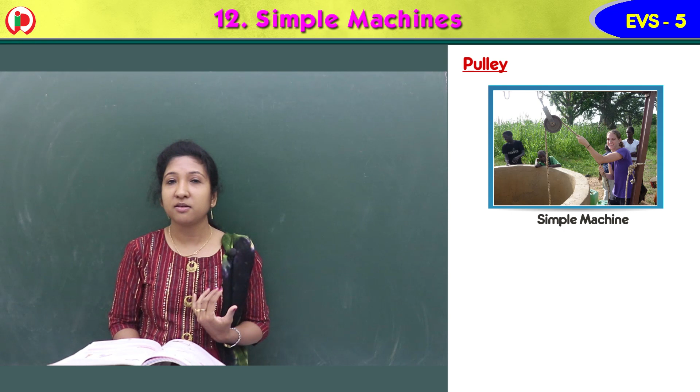Next simple machine we are going to learn about is pulley. Have you seen water drawing from a well? When drawing water from a well, we are using pulley to draw water easily. Without a rope and wheel, if you wanted to take water from a tank or well, you'd have to apply much force. It's not that easy, but when we use this pulley and rope, easily we can take the bucket of water from the well. A pulley is a simple machine made up of a wheel and a rope.

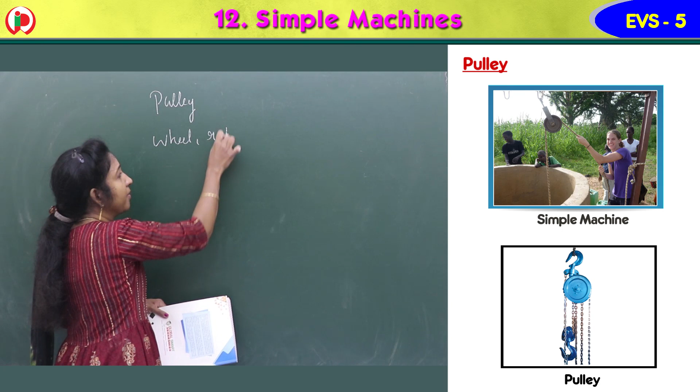Pulley is a simple machine made up of a wheel and a rope. A wheel is there and inside, a rope is there. When we apply force on this side, the wheel will rotate and take the bucket of water, that load, up. The rope fits into the wheel and one end of the rope is attached to the load, while the other end is fixed into the wheel.

Example: drawing water from a well. You can see the wheel is there, and the rope is also there, fixed inside the wheel. One end of the rope has the bucket, the load. When you pull on one side of the pulley, the wheel turns and the load moves. Pulley helps to move load up, then down, and sideways.

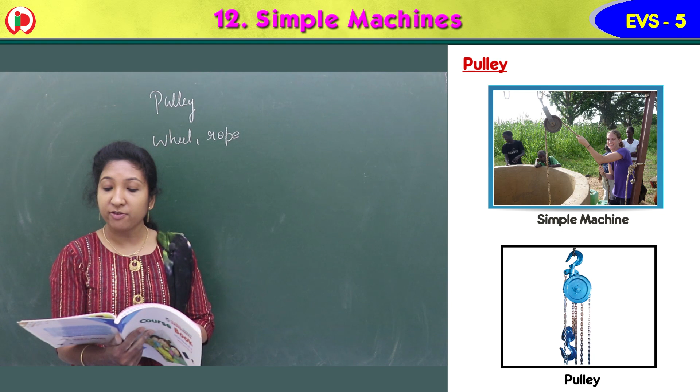It makes the load work easy. In a pulley, an effort can be applied in one direction and a load can be moved in another direction. Pulley can do twice as much work with the same effort. That is an example of drawing water from a well. We can use this pulley to take the load up, take the load down, or move it sideways. That is the main benefit or advantage of using pulleys.

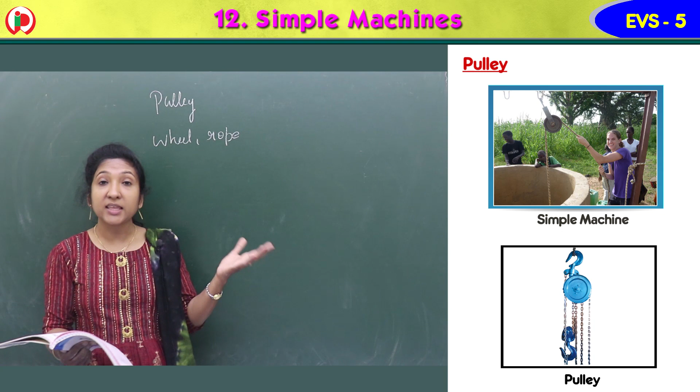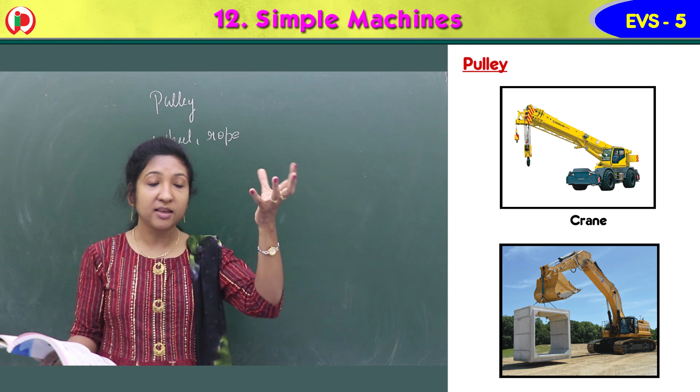You can see the pulley image there, and you know the crane. We use crane to lift heavy objects, to dump objects, and to move objects sidewise also. Have you seen a crane taking objects, moving them here and there, and dumping everything? Yes.

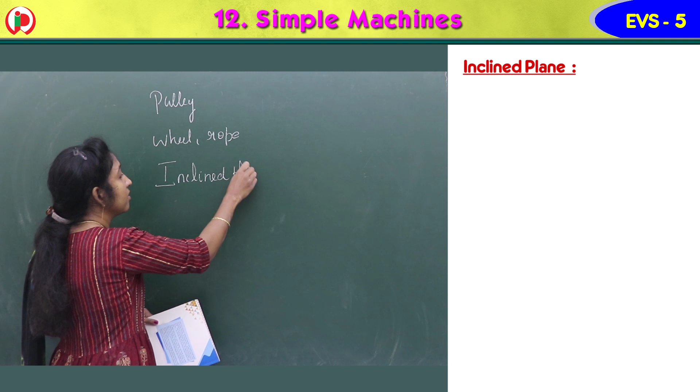Next simple machine we are going to learn about is inclined plane. Inclined, we also say slope. Using an inclined plane, we move objects to a higher place. Using a slope, we move it and take it to a higher place. Ramp and slide are other examples of this inclined plane.

You have gone to a park and enjoyed riding a seesaw, a slide, and even a ladder. A ladder you climb, then you move from that slope, from up to down. The slide and ladder are inclined planes, we say - the slope. Easily you can come down, isn't it? That is an example for inclined plane.

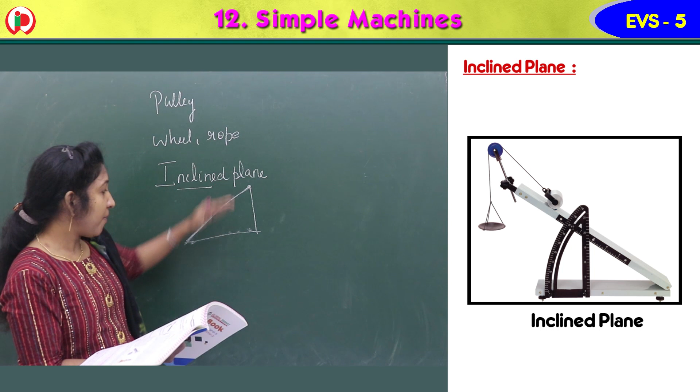An inclined plane is simply a ramp or flat sloping surface. Actually it is a flat surface with one end higher than the other. This is called a slope, or inclined plane. One end is higher than the opposite side, and this allows things to go from a lower place to a higher place.

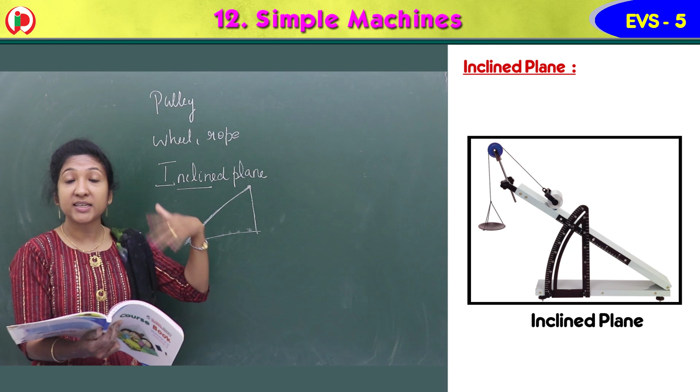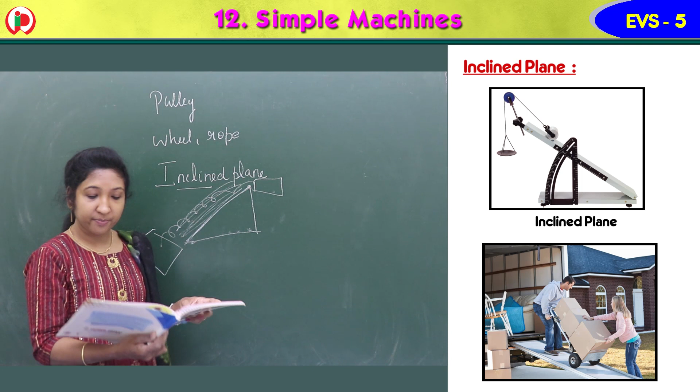It is used to move heavy loads to a certain height. Suppose you want to load a heavy box into a truck - what people do is put a sloping surface like this at the back of the van, roll the heavy box up it, and load it into the van. So loading heavy drums or boxes into the truck.

Less effort is needed to move the object with an inclined plane compared to a steep slope. So very little force is needed to move the object from a lower to a higher surface - we can move it easily. If it's a very heavy object, you can roll it through this sloping surface and take it to the higher surface. This is the main principle behind the inclined plane.

To load heavy objects from a lower surface to a higher surface, we use an inclined plane. You can see people on wheelchairs - on steps it is not possible for them to move, so a ramp is there for them. Easily they can go through that ramp. People going through a ramp - ramp is an example of an inclined plane.

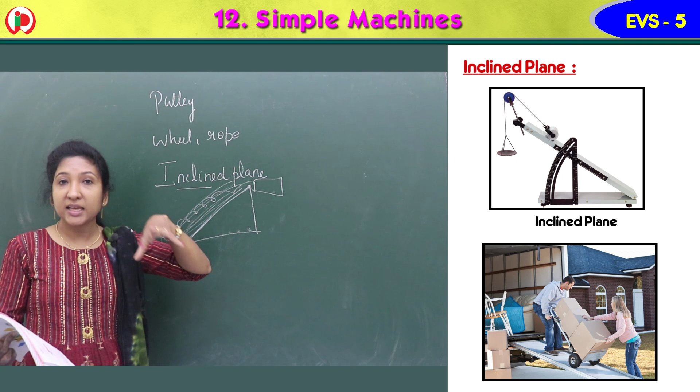Some hospitals, instead of steps, have provided ramps, isn't it? Even we can walk through it easily, and for people who are on wheelchairs also, easily they can go up and come down instead of climbing steps. Yes, that is inclined plane.

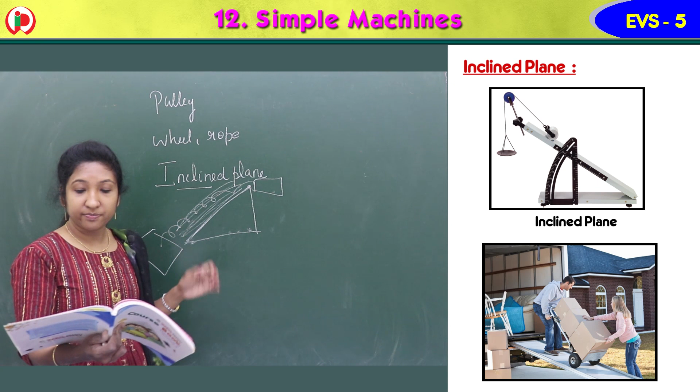Next is screw. We use screw for many things, to screw many items, isn't it? Example, table. Table has 4 legs, 1, 2, 3, 4. How those legs are held there is because of that screw. Using screw, we are fitting the legs of the table there. The other tables, not iron tables, we use screw to attach it, isn't it? Door knobs and all, doors attached, windows attached to the wall. We have some screws there to attach these windows and doors to the wall. We use screw there, isn't it?

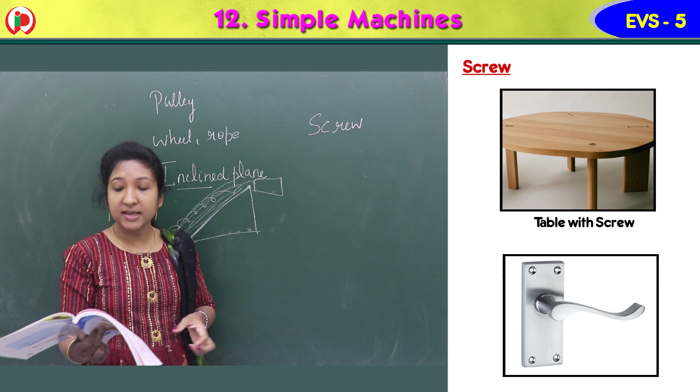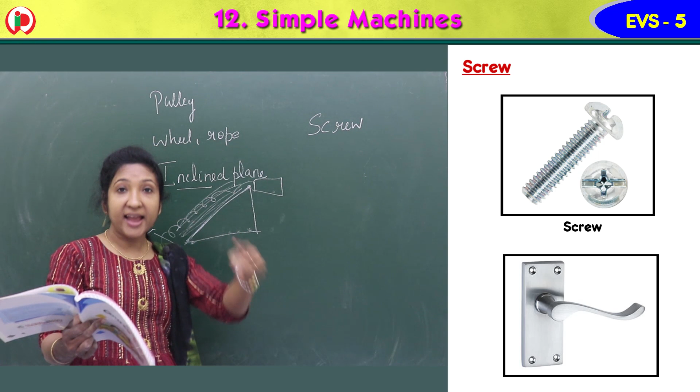Yes. A screw is a simple machine made up of another simple machine. It is an inclined plane wrapped around a cylinder. You can see the image of a screw there. Something is wrapped around like this. It is an inclined plane, we say. Then it has ridges or threads, something that is wrapped around as threads.

Then that changes the direction of force applied. The circular motion helps to move things upward and downwards. A screw holds things together over a longer distance with a stronger grip. We can use screw to hold some things. To drill a hole, we need screw. To hold something, we can use the screw. Then we attach doors and windows of our rooms to walls with screws. A screw is used to lower and raise things, to hold objects together.

Have you seen in workshops, mechanics, how they attach the tire, or if the tire gets punctured, what they will do? For the vehicle, car tire and all, using a screw jack, they make that vehicle go up. Then the vehicle will be a little bit up, so they can do the work easily. They use the screw system there to raise the tire of the vehicle, then easily remove the tire and do the work.

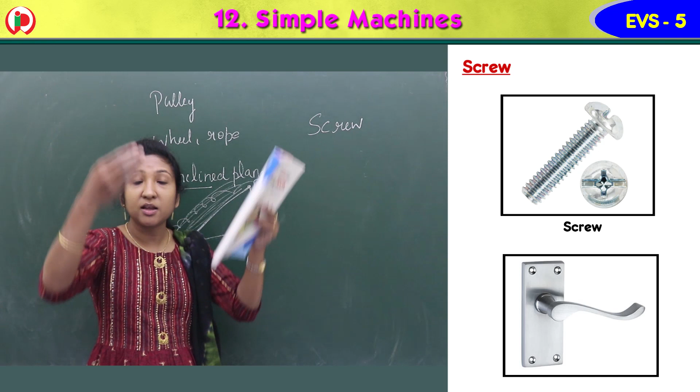So screw, we can use it to hold the objects. We can use it to raise the object. You can use it to drill holes in a wall to fit something. So for all these things, we use screw. Screw jack is also a simple machine which is used to lift up the side of a car or a bus while replacing its wheel or tire.

It is not possible for a human being to lift the bus or car by himself. So using the screw jack, we raise one side of the car up, isn't it? Then we can remove the tire and put the new tire. So that system using the screw, they use the screw jack there, isn't it? Yes, that is about screw.

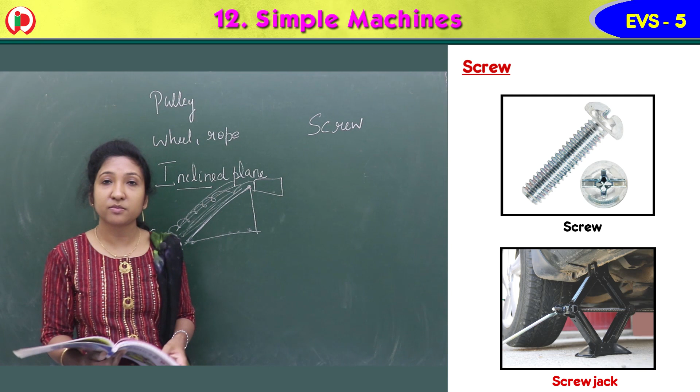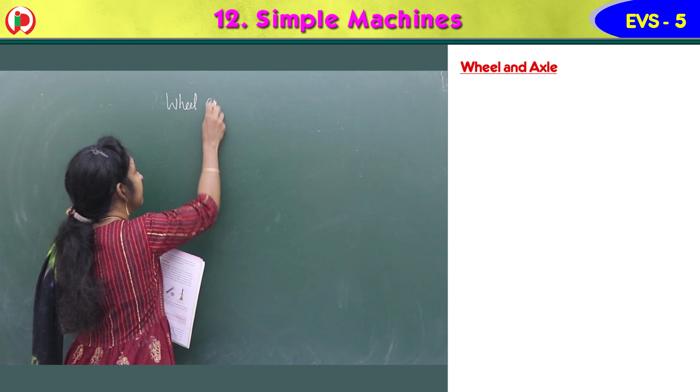So children, next is about another simple machine, wheel and axle. A wheel and axle has two parts. Which are the two parts? Wheel, then axle. These are the two parts of wheel and axle. The axle is a rod that goes through the wheel.

We can tell the example of steering of a car, a wheel of a bicycle. These are all examples of wheel and axle. In the steering of a car, there are axles, isn't it, which make the wheels rotate, same like the wheel of a bicycle.

This lets the wheel turn. A wheel and axle helps to move objects. The faster the axle is turned, the faster the wheel spins. The axle is turned. When we turn the axle faster, the wheel will rotate faster.

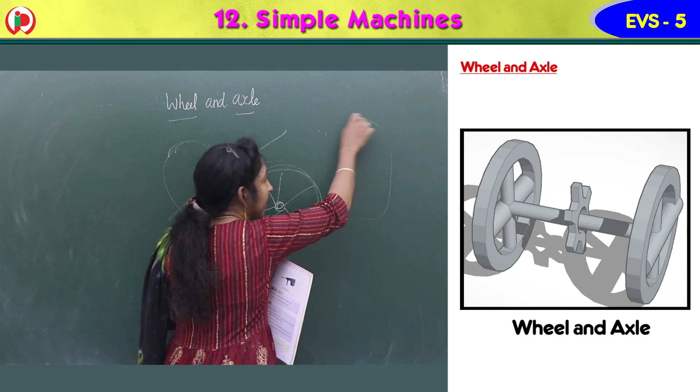The idea of wheel and axle was created when past societies like Egyptians used round rocks under heavy objects to move them. Long years back, Egyptians used round rocks under heavy objects to move them.

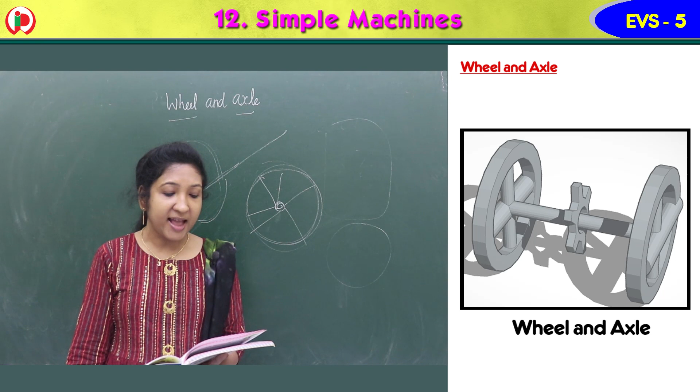The two examples of wheels and axles are roller blades and gears in clocks. Roller blades, like skaters use. Under the shoes we keep those wheels which makes people move faster.

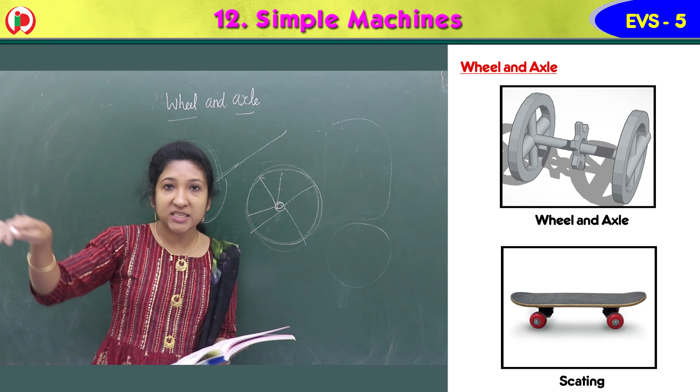Then gears in clocks. In a clock you can see the hour hand, minute hand, second hand. So this axle makes this wheel rotate, isn't it? So gears in clocks, in watches.

Then they are machines because they help people to move faster. The hands of a clock move because of gears. The hands of the clock are moving because of these gears.

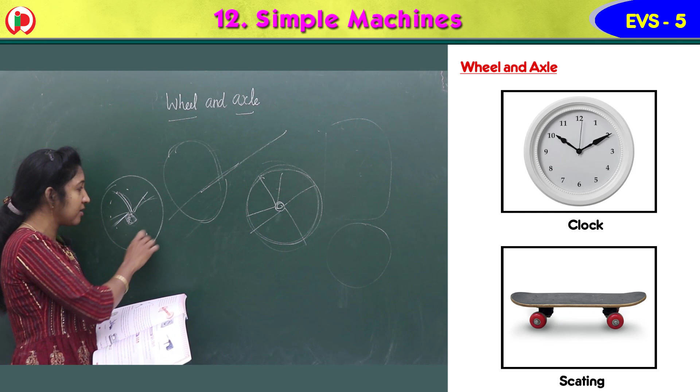The round circles with ridges turn, acting like a wheel. The hands of the clock are attached to axles. Because of that it is rotating, and we are seeing the time, isn't it?

So roller bladers or skaters, and gears in watches, these are all examples of wheel and axle. Wheel of a bicycle, steering of a car, these are all examples of wheel and axle. Wheel and axle has two parts: wheel and axle.

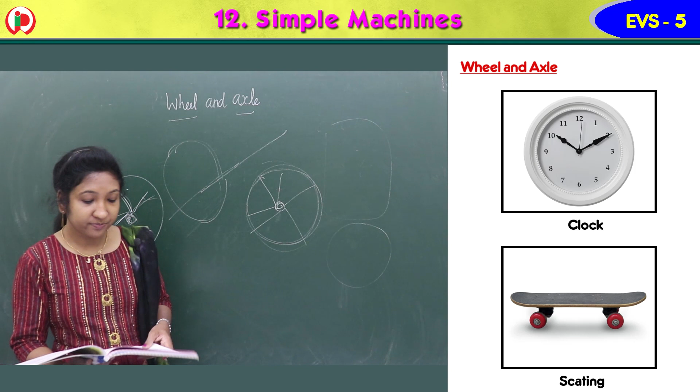Next is another simple machine: wedge. The main example of wedge is an axe, which we use to split wood into two parts to cut the wood. Axe is a simple machine, it is nothing but a wedge.

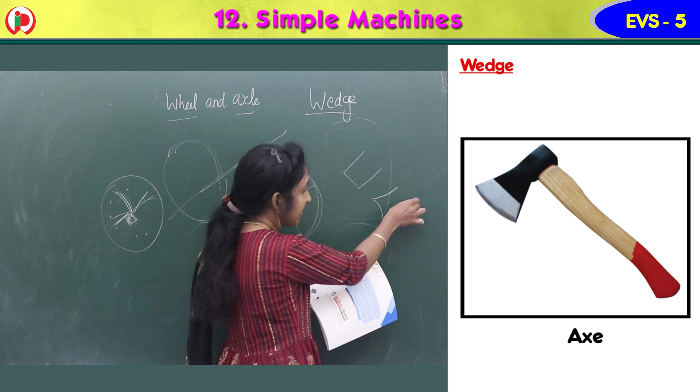Axe works on the principle of wedge. A wedge is a simple machine made up of two inclined planes put together. See the axe picture, we can see two inclined planes put together, one here and one here, forming the axe. So wedge is a simple machine made up of two inclined planes put together.

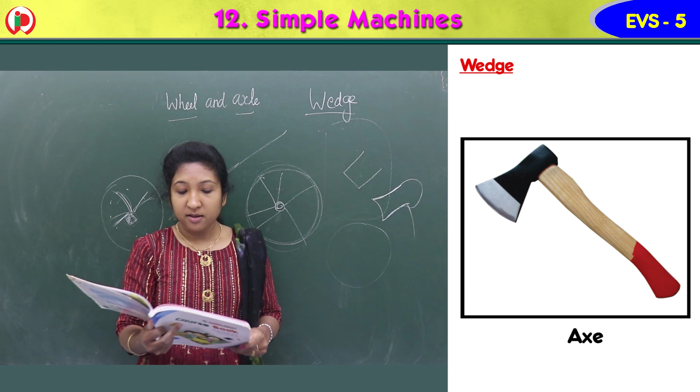These two planes meet and form an edge. Wedges are used to push two objects apart or cut objects into two pieces. If we apply an axe to a big piece of wood, it splits into two. We use wedge to cut objects into two parts.

A wedge gets in between objects and splits it apart, for example an object like wood can split apart with a wedge. You probably use a wedge every day.

A fork is considered a wedge. It is made up of 4 to 5 wedges put together, and it can be used to cut or split food apart. We can split food, cut food, and hold it, so there are many uses for a fork.

So wedge is a simple machine with two inclined planes put together, for example a fork or an axe. We use an axe to cut wood, splitting it into two parts. So for cutting or splitting objects into two parts, or holding objects, we use a wedge.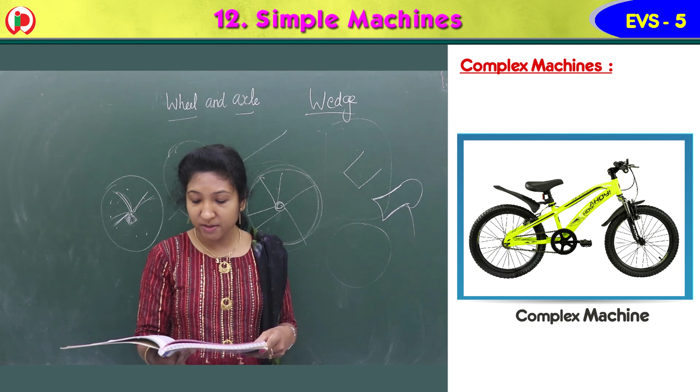Complex machines, I already told you, a bicycle is a complex machine because it is made up of many simple machines. Many parts of simple machines together form a bicycle. So a complex machine is a combination of two or more simple machines that work together, such as when a lever and wheel and axle combine to form a cart.

You have seen a cart pulling objects, isn't it? A cart actually uses a lever as well as a wheel and axle. It has wheel and axle, and a lever too, put together to make the cart. A bicycle is an example of a complex machine because it involves the use of two wheels and axles.

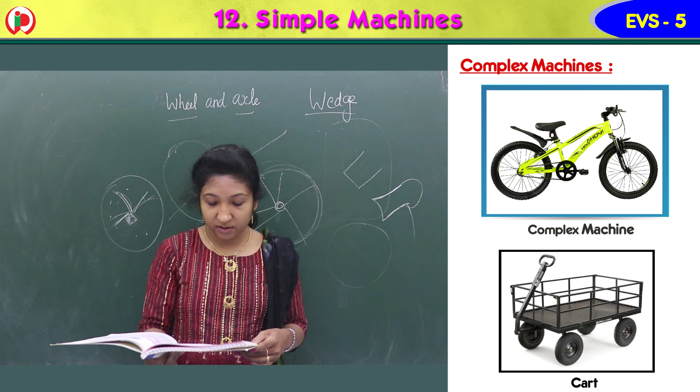Here are some other examples of complex machines. A clock is an example of a complex machine. Aircraft or aeroplane is an example of a complex machine. A sewing machine, used to stitch clothes, is an example of a complex machine. A washing machine is an example of a complex machine. A drill machine is also an example of a complex machine.

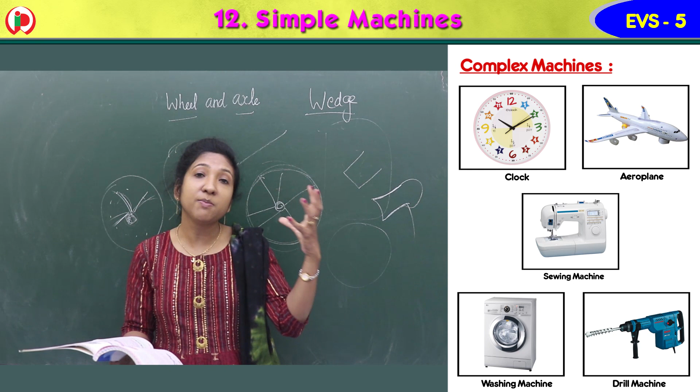A complex machine means it's a machine made up of two or more simple machines. Two or more simple machines together form a complex machine.

Words to remember. Ridge means a long, narrow hilltop or mountain range. Wedge is a piece of wood or metal having one thick end, called a wedge. Example is axe, we know, isn't it?

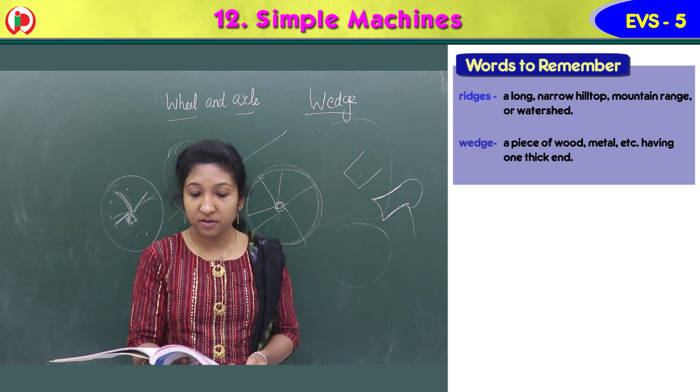We learned about types of simple machines. Machines make our work so easier. It helps us save our time, and it is very convenient for us to use machines. There are different types of tools or simple machines we use in our day-to-day life. Knife, axe, scissors, these are all simple machines, we say.

There are 6 types of simple machines. We learned about lever. Lever has 3 parts: rod, fulcrum and effort. Examples: seesaw, ice tongs, forceps, hammer. These are all examples of lever. First class lever, second class lever, we learned third class lever also.

Then pulley. Example is drawing water from a well. It consists of a rope and a wheel. On one side we apply force, on the other side load is attached. It is used to lift the object, move the object sideways and put down the object. Example: crane. Then we learned about screw.

Using screw we can hold objects, and also we can drill holes to fit some object. We use screw to lift the object. Screw is another simple machine that we use in day-to-day life. To attach doors and windows on the walls, we use screw system.